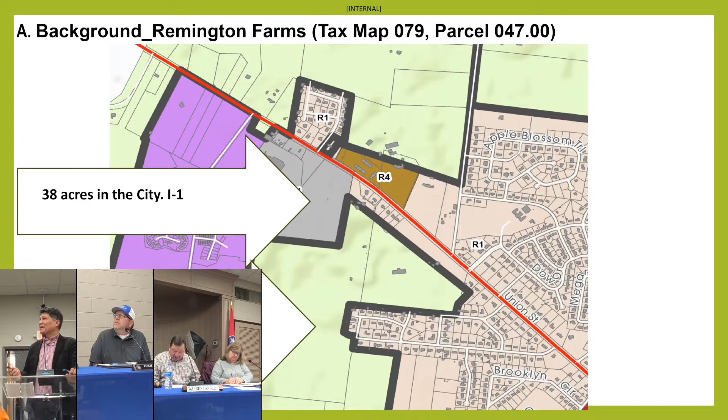Since that time, the applicant has addressed all the items, 1 through 8. Number 9 is a general comment that we add under the procedural notification, and that typically happens further down the line when, by the time the final plat occurs, that is the recording of the stormwater management agreement.

These meet our standard, but just a general comment: you've got 9 units and 13 parking spaces. If a couple people have a friend over, you'll have people fighting over parking, so maybe we should look at some of those parking standards. Yes, at the end during the staff report I have that as one of the items.

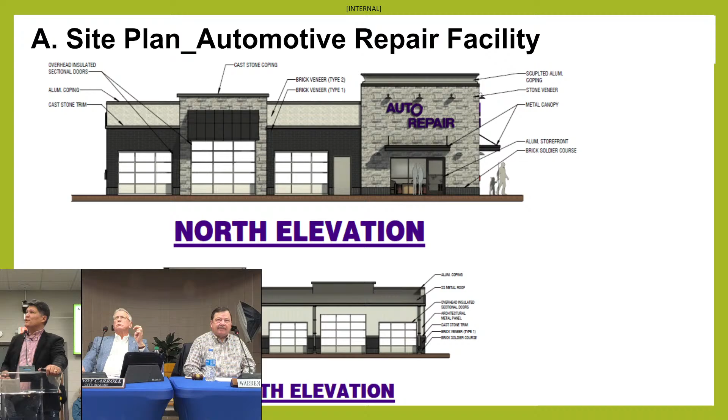Going to the elevation, you'll see the north-south elevation and then the west and east elevation. Referring back to the design standard, it's a bit hard to read, but typically the preferred materials are those visible from the right of way, which historically is where people put the nicer materials for what's visible.

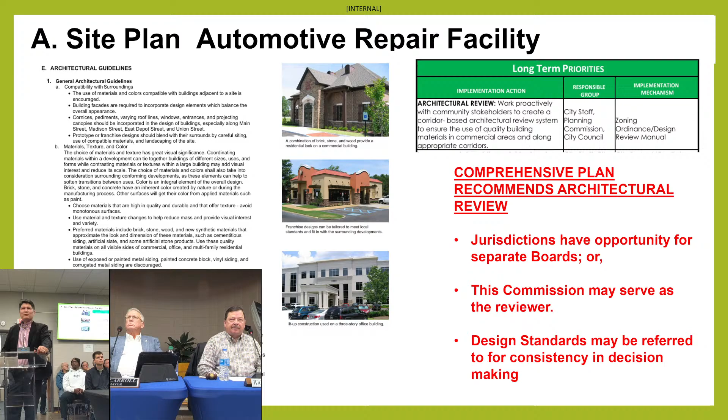On the dumpster, does the metal panel have to conform to the exterior surfaces, or can it just be metal? The dumpster also has to match pretty much the same design.

It's not on the main thoroughfare, but that's around the property we're looking at for a new hotel and all those kinds of things. Are they going to have vehicles that'll be long-term there while they're working, or will it just vary? You just don't know?

I don't know that part of it, but I'm sure the maintenance of traffic will be a consideration during the construction time period. In this map you can see where all the developments are. This is where this facility is, this here is I think a CrossFit on this site, and this is the hotel site — they're all on the agenda today.

Right. And we're talking about bringing the traffic from the hotel back out on Green Lane, correct? As well as on North Main, when that develops? Have we gotten that far yet? We haven't gotten that far yet.

Is there some type of barrier used, maybe if there was long-term storage, to buffer that out? I know it's not a major thoroughfare, but with automotive uses things can get a little messy. I know we have codes to deal with that, but is there anything we can do up front to buffer that, maybe fences or something? Is that in the design or the plan?

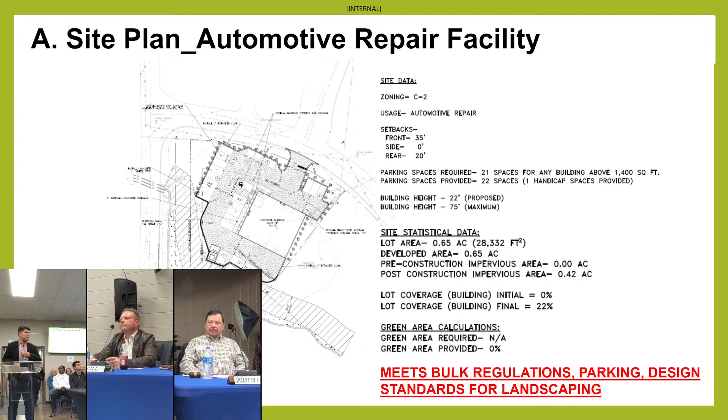What do you mean by buffering — are you talking about screening? Yeah, screening it. Typically, in our design standards, you would have screening if they were different uses. Since they're all C2 commercial zoning districts surrounding that, there's no requirement other than what's in our design standards for adding landscaping surrounding the parking lot and typically around the building as well. So it's totally surrounded by C2.

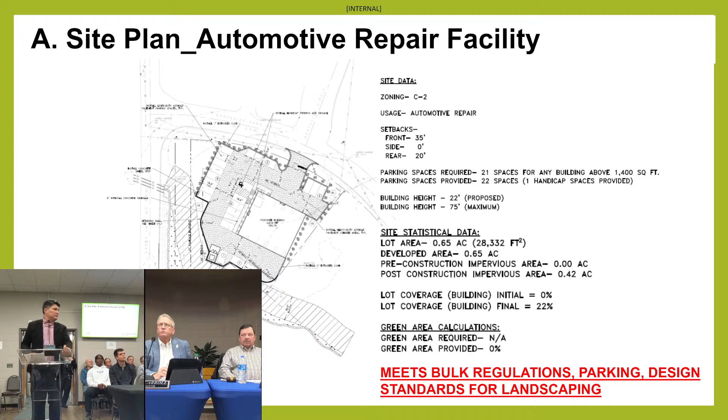I'll entertain a motion. Motion approved.

With their condition of the 3 procedural notifications. Okay, let's see, there are the procedural notifications. Okay, second, I have a second.

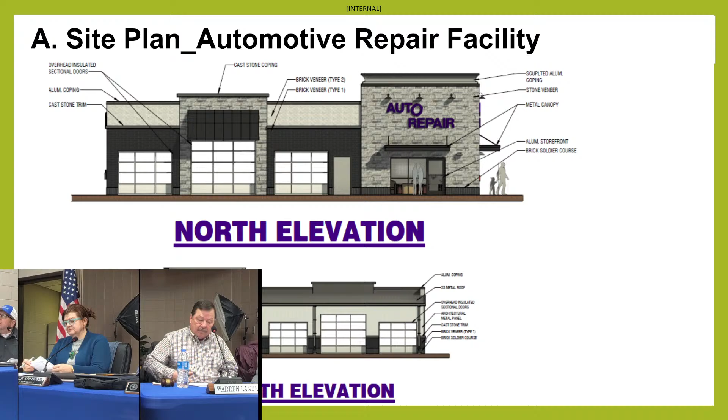Roll call. Chairman Landers, yes. Commissioner McGee, yes. Commissioner Mower, yes. Councilmember Blevins, yes. Commissioner Wilhoit, yes. Mayor Carroll, yes. Commissioner Deal, yes. Commissioner Gonzalez, abstain.

Consideration of site plan application, 4,642 square feet of emergency dispatch center located on Industrial Parkway, identified in Bedford County tax records as tax map 78N, Group F, parcel 6.01, zone I2, general industrial. Total acreage of the parcel is 1.49 acres. Bedford County Emergency Management, owner, Kline Swinney Associates representing.

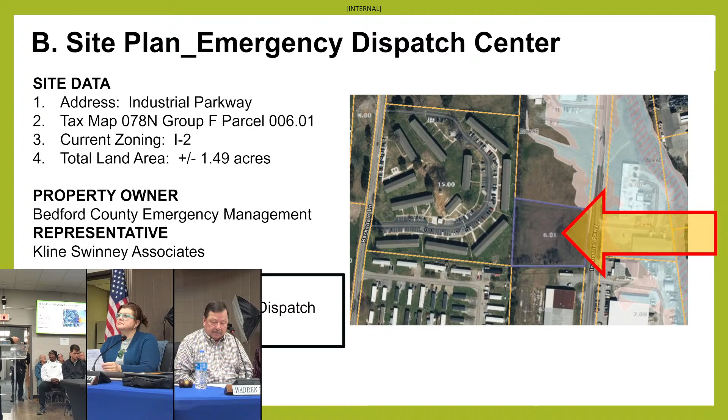So for orienting, this is Bedford Manor here. It's on the backside of Bedford Manor along Industrial Parkway. This is the same area that Public Works is located in. They met all of our requirements.

Majority of these, as well as 5 of them, are related to general comments, such as recording the stormwater management agreement, if there's any permits that are required for TDOT access. This is a secured facility according to the applicant, and they're requesting waiving of the landscape requirement, similar to the Justice Center.

In this case, they have just an open, empty lot that has high visibility. And then Shelbyville Power had one item, which was the cleanouts for according to Shelbyville sewage system requirements. And then they'll need electrical feed for the backflow device. But these are all items that can be handled during the construction phase.

For the design portion of it, this is in the industrial zone, so they're permitted to have metal siding, things like that. And I believe, based on all the other review, it meets all of our bulk regulations, our parking, and you'll see the secured facility note on the site plan.

And the applicant, they were here. They did have one change to the material, and maybe you'll be kind enough to show us where it is. What you see with the vertical lines that we had is metal paneling. It was on mineral wool insulation. We were changing to EIFS because of budget overruns. We're planning on doing a smooth metallic finish EIFS and doing vertical grooves in it from the street.

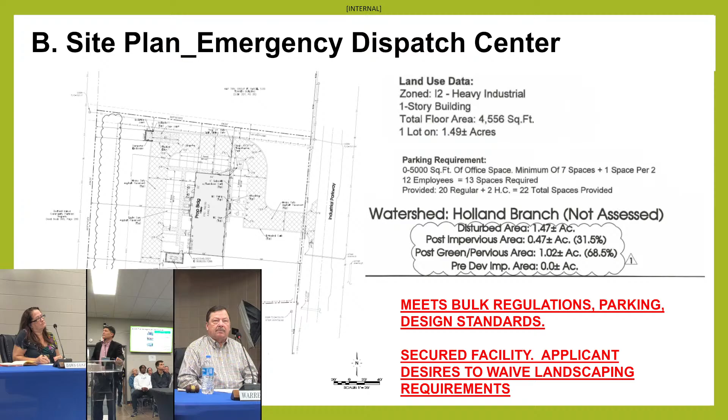99.9% of people won't be able to tell the difference between the two once we change it out. There's a lot of flexibility in the industrial district as far as the material for the siding goes. All the brick that you see in those renderings, all the brick stays. We're not removing any brick. So, okay.

I have a motion to approve. Second. I have a second.

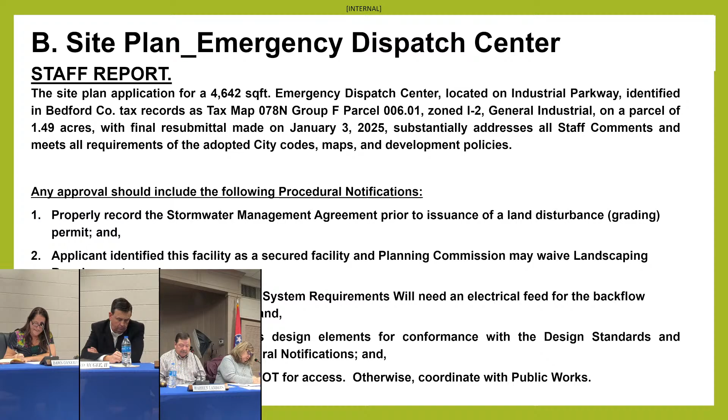Roll call. Mayor Carroll, yes. Commissioner Moore, yes. Commissioner Gill, yes. Commissioner Gonzalez, yes. Chairman Landers, yes. Commissioner McGee, yes. Councilman Blevins, yes. Commissioner Wilmot.

Consideration of a site plan application, 4,000 square foot CrossFit gym located on Lot 6 Northside Park Drive. Identified in Bedford County tax records as tax map 78, parcel 12.10, zone C2, general business. Total acreage of the parcel is 0.46 acres. Trey Stewart, owner. Scott St. John is the representative.

Yep, but I see I'm in error here because that is supposed to be Trey Stewart that owns that property and not Akil Najad. So in essence, the same thing with this one.

There were only 3 procedural notifications, having met all the other standards related to this project. 2 of them, 1 and 3, both have to do with the construction. They're just general comments on there.

And then the planning commission, if you'll review the elevation building design, and as we can see it there, it looks good. But as far as the site plan goes, it meets all the requirements for the landscaping, parking, as well as bulk regulations.

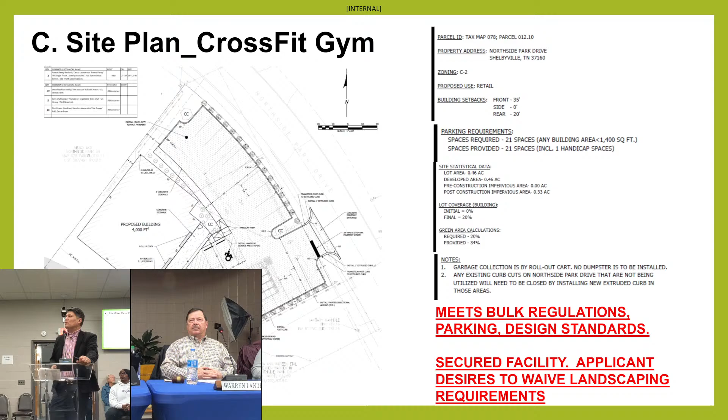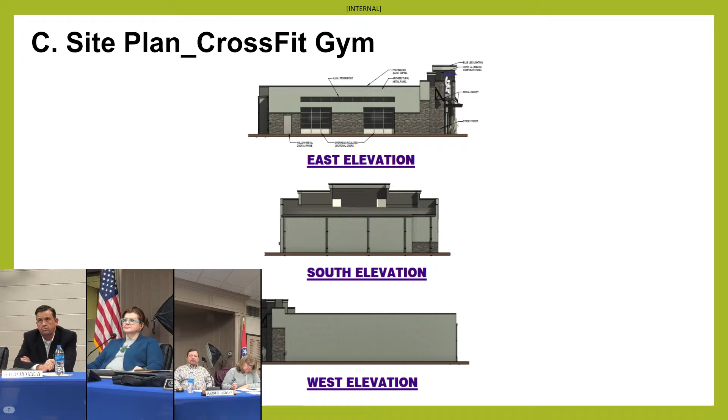What's the parking area for that? How many spaces does it have? We haven't gotten to that point on the site plan yet, have we? Yes, the minimum parking required is 21 for this size building, and that's what they have, including the handicap space.

Because we don't need that last condition now, or do we? If we are approving it, I'm trying to figure out a way to handle that. Number 2 or number 3? If we do approve it, then we're approving the design features of the elevations.

I know it takes some getting used to because I just threw it in there today. It's all good.

I'll make the motion to approve, with two or three procedural notifications, as presented. There you go, three procedural notifications. Second? Did we get a second? Okay, motion made and seconded, roll call.

Commissioner Wilhoit, yes. Councilmember Blevins, yes. Commissioner Moore, yes. Commissioner McGee, yes. Chairman Landers, yes. Commissioner Gonzalez, abstain. Commissioner Gill, yes. Mayor Carroll, yes. It's approved, thank you.

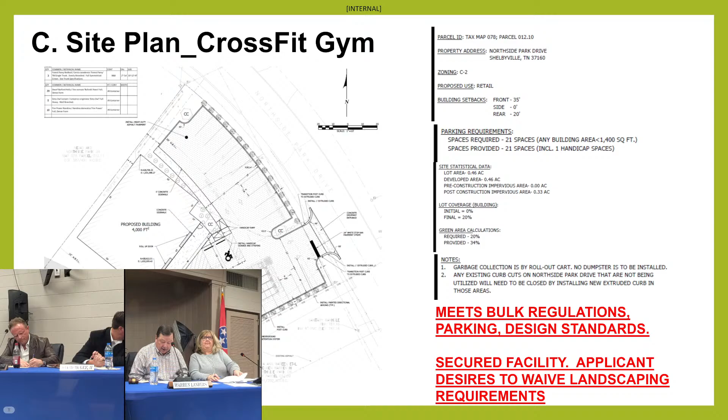All right, consideration of the site plan application for a 46,610 square foot Hampton Inn Hotel located at 106 Northside Circle, identified in Bedford County tax records as tax map 78, parcel 12.16, zoned C2 general business. Total acreage of the parcel is 1.62 acres. TENN Star owner, March Adams and Associates as representative.

Okay, so you see all the development in this corner area, but the whole area mostly is built out. So this is the Hampton Inn, and one of the things that actually just made me think about, I'll have to confirm, buildings over 20,000 square feet require a TIS.

Is it the building footprint? I think it's in the subregs. It's over 20,000 because we required that—that was one of the comments I made, actually, it just made me think about it when I was looking at and thinking about my comments. Let me look that up.

But at any rate, there were a number of comments on these. Most of them are minor, and they're general, recording the stormwater management agreement. You'll see that on all site plans as well as subdivisions that have a stormwater feature. This one didn't have a photometric plan, but that's a minor item they can easily correct. Typically we request the photometric just to see what the lighting spilling over the property line is.

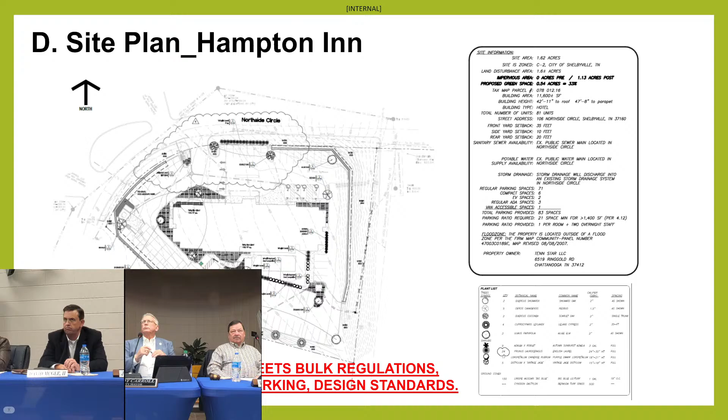But it met all the other requirements for bulk standards and parking, and as far as the design goes, this is consistent with their corporate design, I believe. You'll see from the elevations the different types of materials they're using—they've got EIFS, as well as some materials like stone or brick-type material.

So 4 stories, is that what it looks like? Correct, yeah. Yes, in this zoning district you're allowed up to 75 feet, and I believe this one was 50 feet. Okay, exit and entrances—are there more than one?

Let's see. Okay, yes, here's one. And then it looks like they're just the one. Just the one, okay. Are you with—yes. Joseph, yeah. Yes, okay.

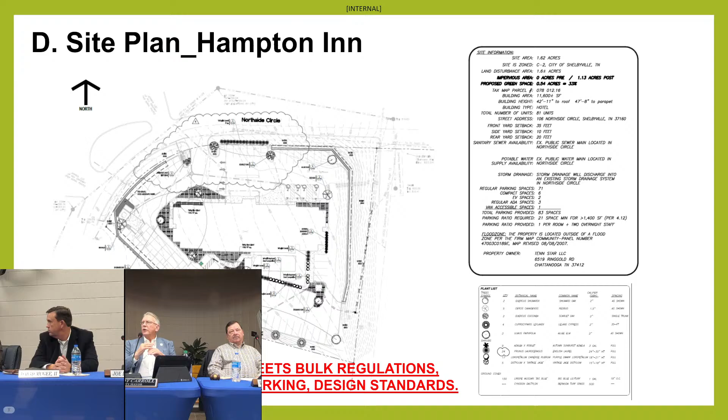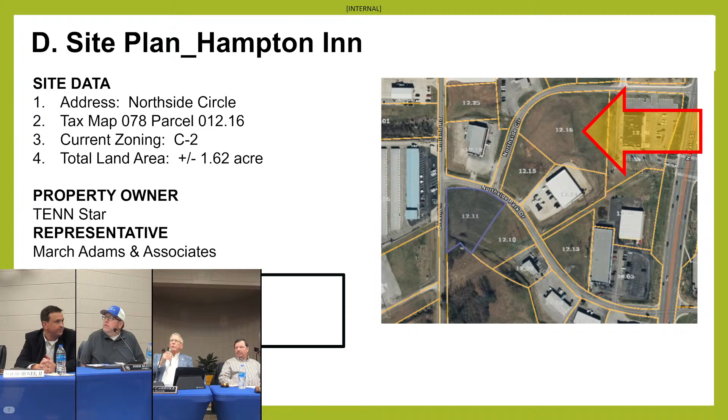This would be covered by the TIS, I guess, but at this particular location, there's no way to get to a traffic signal from here. All the cars coming and going from 231 - both of those intersections don't have red lights right here. That was going to be my concern on that.

Does it require a TIS currently? Yes, it'll require a TIS. So in your approval, if you can add one of the procedural notifications... Cade's working on it. Typically a traffic study can be handled as part of procedural notification.

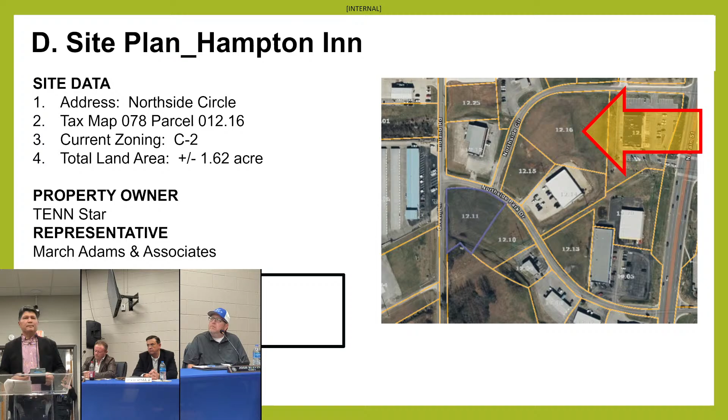That's been done on multiple site plan projects, like Cooper Steele's project - that's the most recent one. So if we can add one procedural comment, number 6, requiring a traffic study, we can coordinate with the applicant on which intersections to analyze. We'd need approval from staff, I guess, instead of the planning commission? It doesn't need to come back before the planning commission, because if there's any off-site improvements, we can handle that amongst staff as well.

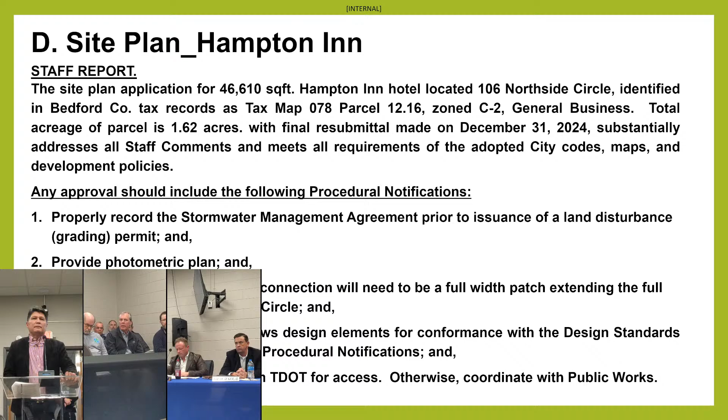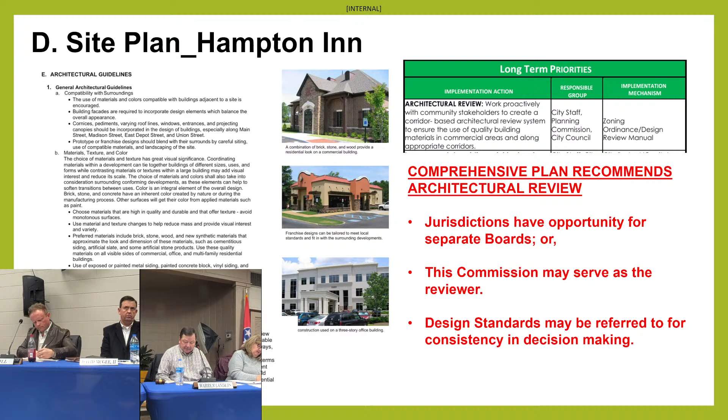Make a motion to approve with the attached 6 procedural notification, including the traffic study. Second. I do have a second. Roll call: Mayor Carroll, yes. Commissioner Gill, yes. Commissioner Gonzalez, yes. Chairman Landers, yes. Commissioner McGee, yes. Commissioner Moore, yes. Councilmember Blevins, yes. Commissioner Woodhull, yeah. Thank you.

Consideration of a minor subdivision preliminary plat, Jennings Station Phase 3, located on Jennings Lane, total of 4 residential lots, identified in Bedford County tax records as tax map 79E, Group A, parcel 1.02, zoned R1 low density residential, total acreage parcel 2.49 acres. Gary Boyce Construction owner, North Dakota Surveying representative.

This is the location - you can see it's just south of Stardust and to the right of Jennings Lane. That's where I live, this is the actual graveyard. I think there's an access back - there's one house when you turn off Union Street on the right, and then the lots - there's a pumping station or something there, and then those 4 lots go between there and the next street up, which is Stardust I think. Yes, and there's an access easement - I think it used to belong to the Church of Christ.

This one has 4 additional procedural comments as well. Number 4 has to do with access, they'll coordinate that with Public Works, but I've been putting all these general comments on there. If the planning commission approves this, they'll need turnaround space to avoid backing out. And also adding a note - as far as no construction permitted in stream buffer, we're planning to make that more consistent within the procedural comments too. It's not noted on there. And this one doesn't have stormwater management listed, but it's just a general comment.

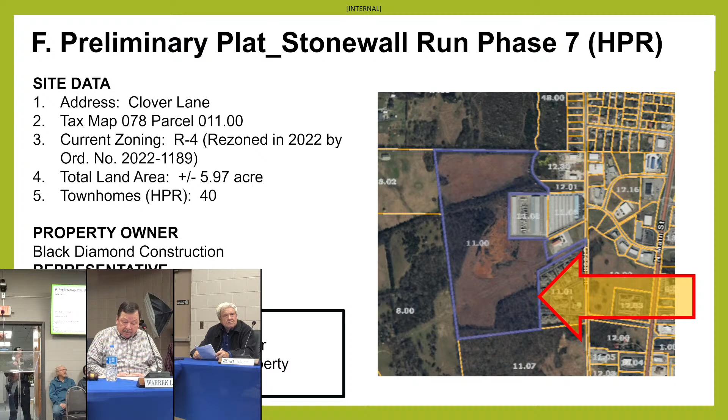The location of this application is right along here - this is Curl Properties abutting it. This is for 40 townhome units. This property was rezoned to R4 back in 2022. There were a number of items that needed to be addressed in this application - you'll see a number of comments, but it might be easier to go straight to the plat itself. This is the concept plan reviewed back in May of 2024. When you look at the actual preliminary plat, it's pretty similar - I don't think there's any changes to it.

This is the location, Phase 7. This is the preliminary plat, gross density of 86.68, so they're well below that.

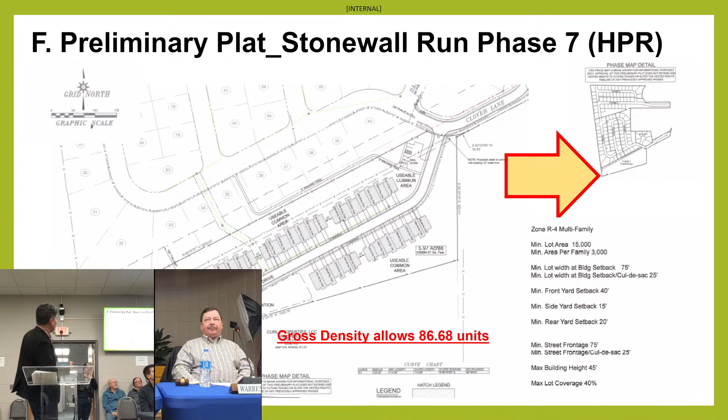Some of the comments that came back during the staff review had not been addressed, although I spoke with David Boyce this afternoon on some of the items, and he nominated Scott St. John to speak about it if we need to.

But some of the items missing on this location had to do with the length of the driveway, and in the plat itself, it identifies the driveway width as 10 feet. One of the concerns was the available parking. The applicant had suggested you've got 2 parking spaces, one in the garage, one outside. Will Owen had recommended possibly widening the driveway to allow for 2.

David suggested that's what he was going to do, but it's not identified in this plat. Some of the other items, there's no setback on it, so we couldn't tell how many parking spaces were going to be on there. As you can see, here's a drive that's 10 feet wide with 1 in the garage, but it's insufficient for 2. I can't tell without actually scaling it.

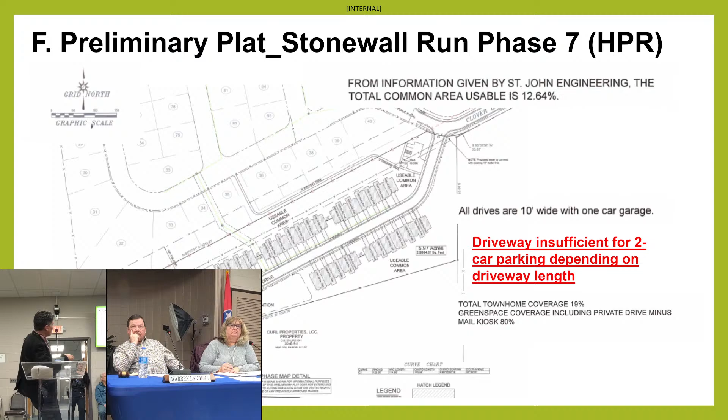As far as meeting all the green space requirements, it even identifies that green space doesn't include the mail kiosk, which is a pet peeve of everybody's, including myself.

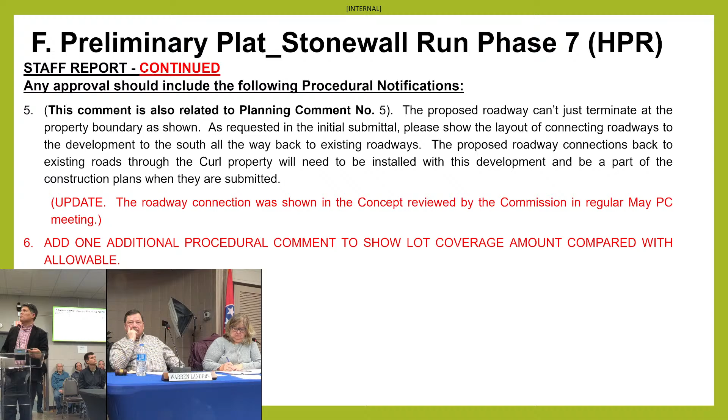As far as the procedural comment, I believe the mailbox kiosk is now a requirement from the federal postal service. That's correct. So they would need to include that, correct? That's correct. Mail kiosks are a requirement for multifamily, and typically what ends up happening is that it gets calculated as part of the green space.

As far as the procedural comments go, there's a couple that are just typical for during the construction phase, which is recording the stormwater management agreement. Utility layout needs to be discussed, but that can be done during construction as well. One of the missing items is a dimension for the individual building.

Last month we had Celebration Downs, which was a similar case. But I wanted to also bring up that about a year and a half ago, 2023, there was an application, Madison Town, very similar to this one with some of the information missing. That one was approved, and Celebration Downs was deferred. I only bring that up to offer a little more consistency in the decision making, but also to bring a little more history, because I hadn't done that in the past.

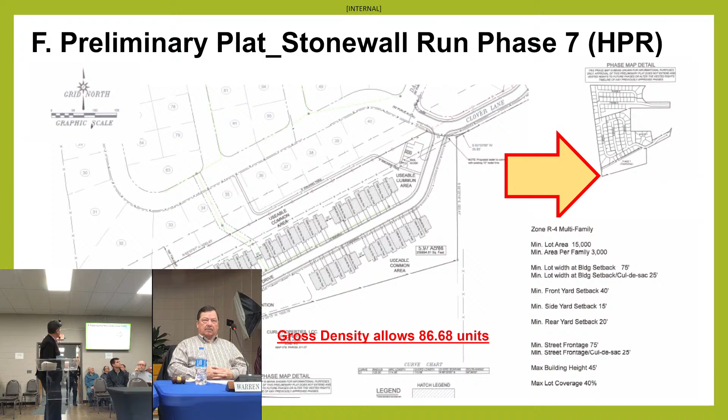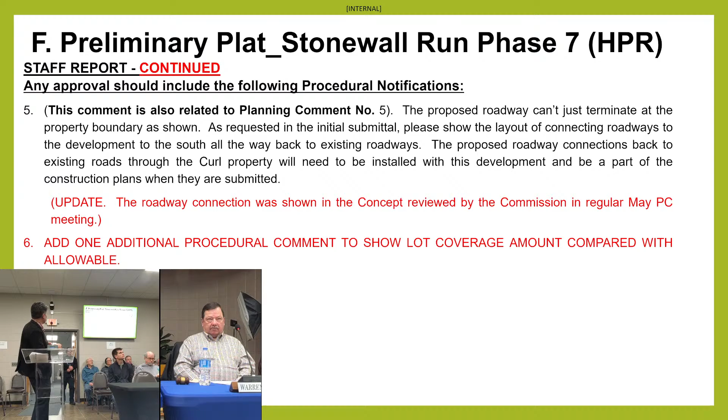Going back to the procedural comments, number 5 is the one related to the drive connection. So we have 3 comments that were not addressed, and one additional one, which is to provide the lot coverage. Based on this information, the planning commission could either approve this with those procedural comments, or if they prefer to defer it, that's also an option.

Are these comments sufficient to be addressed in 30 days? Sure. So yeah, I would say we make a motion to defer.

I also have a question regarding the two drawings you showed. Was the connection shown on one but not the other? Yes, that right there, this connection, that connection is on somebody else's property. So how does that pertain to us approving or disapproving that connection if there's no... are we going to approve it without that connection? Because we can't make them make that connection unless they have a lease option with the neighbor.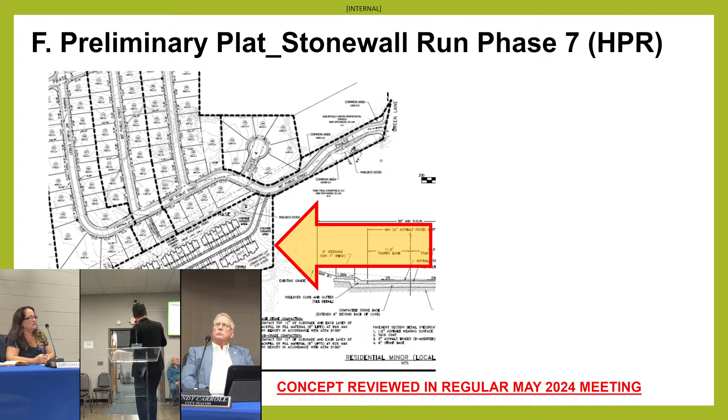No, that's not the intent. The intent is just to clarify what that connection is, because you see it here and it's not shown on here. Yeah, but you see it on one, so who's going to be responsible for making it? Are we going to make it a priority to make sure that connection is there, or are we not going to require them to have that? I'm confused.

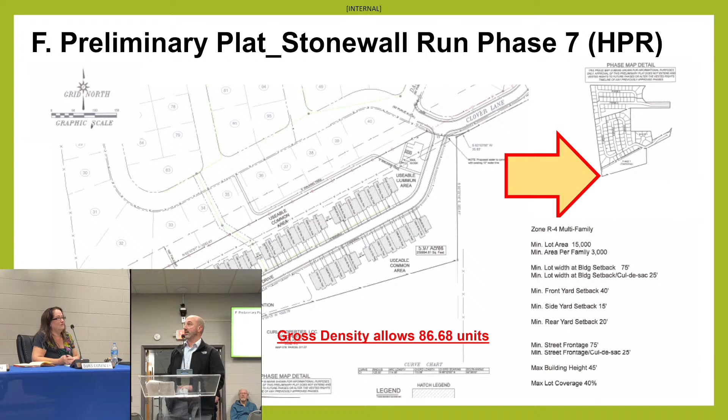The staff comment was that connection absolutely needs to be a part of this approval. The applicant has proposed that connection, and we will implement it. Otherwise, this would not be built in the manner I'd recommend. So we need to make a motion to not approve it until we know they've acquired that piece of land, or have an agreement with the neighboring property. No, you can approve the preliminary plat contingent on requiring that connection. Then when construction plans come in, if there are no plans for that connection, we won't approve them and they can't proceed.

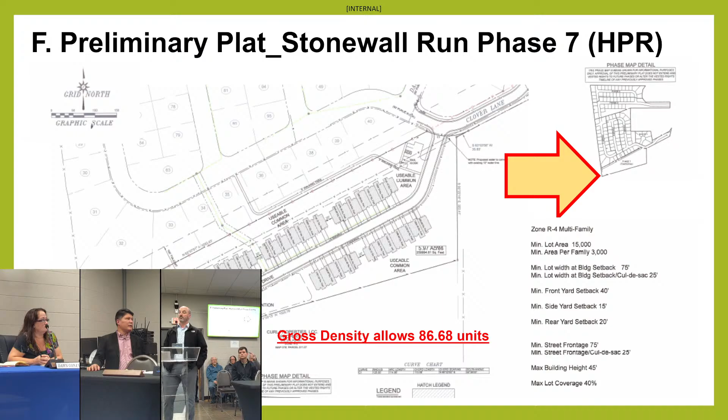So I don't think you necessarily need a condition requiring proof the adjacent property owner agrees. Although staff has had discussions with that adjacent property owner, and they've confirmed agreement with the layout of that connection—it's the same design engineer. So it has been coordinated between the property owners. I don't anticipate any issue, but that connection absolutely needs to be made. Otherwise you've got a really long dead-end cul-de-sac without a turnaround, particularly for emergency services vehicles. So that's why I would not recommend approving it without that connection or an alternative measure that hasn't been proposed. I agree.

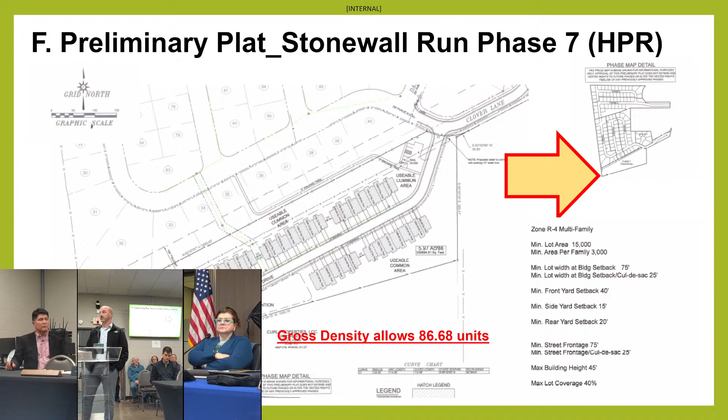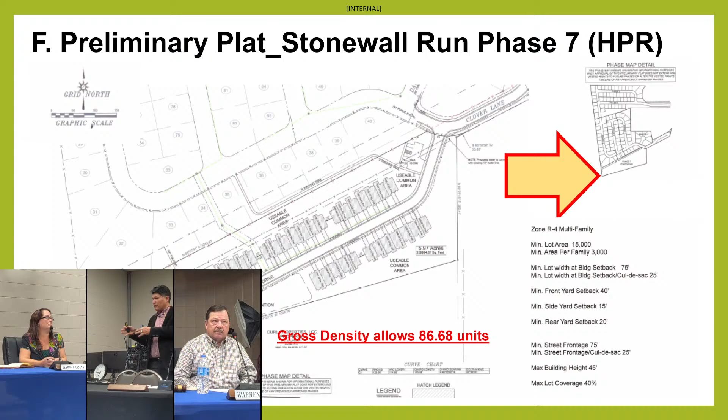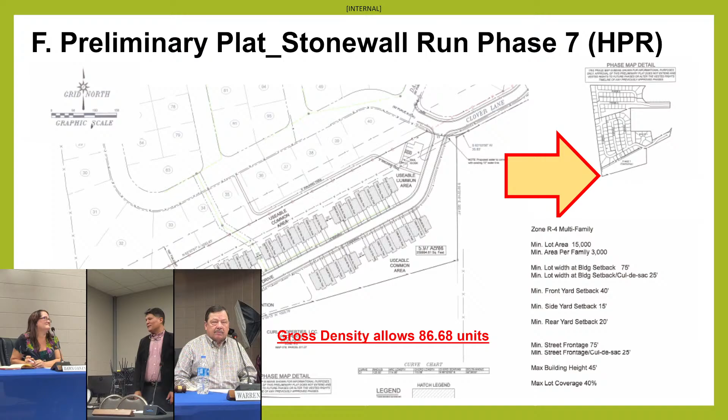My main concern was that he's only shown the connection to the property line because legally that's his boundary. So how do we ensure the development continues in that direction beyond the boundary? Just so you're aware, the preliminary plat, construction, as-built, and final plat all have to be consistent. So at any phase, definitely at construction, there's the ability to address that condition. And both parties are in agreement—Greg Curl is the owner of that property, and he agrees as well. So what you'd see when the final plat comes back is a dedication of right-of-way through the Curl property incorporated into that final plat.

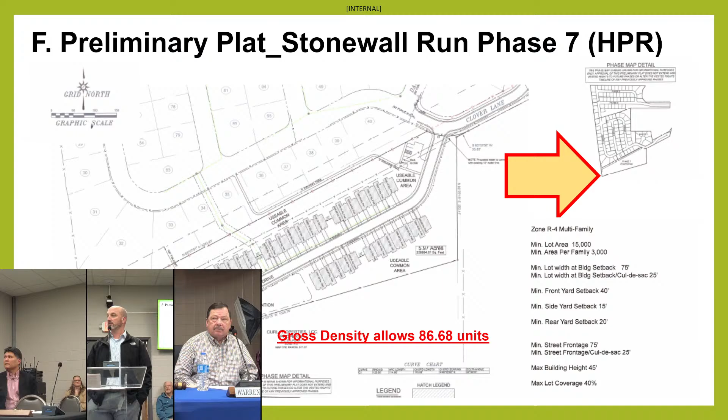Okay, I have a motion to defer with those comments, and since I have a second, we will do a roll call vote on the deferral.

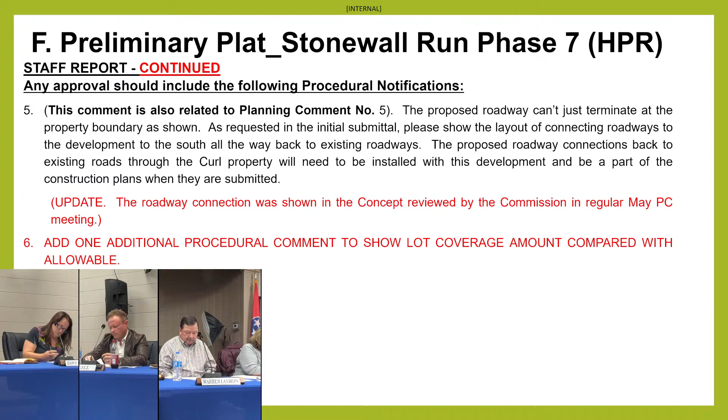Commissioner McGee, yes. Councilmember Blevins, yes. Commissioner Wilhoit, yeah. Commissioner Moore, yeah. Mayor Carroll, yes. Commissioner Gill, yes. Commissioner Gonzalez, yes. Chairman Landers, yes. That will be deferred for 30 days.

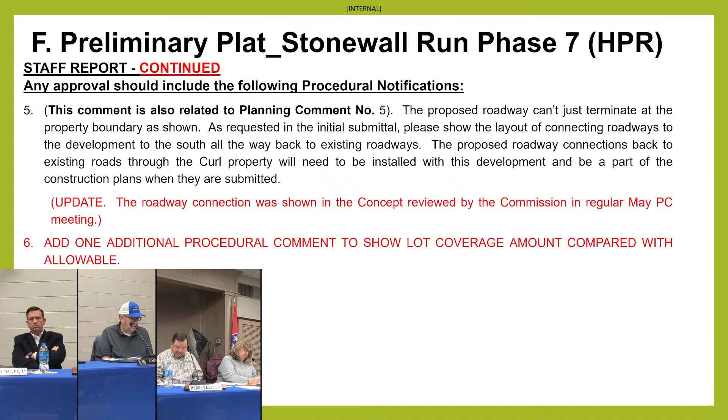All right, consideration of a major subdivision preliminary plat, Global Manor Phase 6, total of 39 residential lots on Triple Crown Court, Winners Circle, South Winners Circle, and Meadowlands Park Drive, identified in Bedford County tax records as tax map 69, parcel 25.02, zoned PUD. Total acreage is 7.28 acres. Global Homes owner John Stefanski is represented.

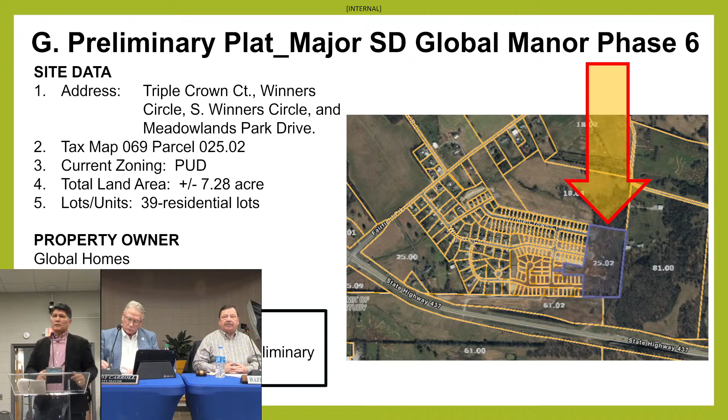So the next three applications are all Global Manor. If you recall, in the October meeting we saw this PUD amendment, so all the preliminary plat applications you're seeing today relate to that. This one is Phase 6, located on parcel 25.02, with 39 single-family lots in a PUD. All of these met the requirement for a preliminary plat. General comments again on recording the stormwater management, and coordinating any type of access. This one, because there's a public right-of-way, has a dual nexus—the essential nexus and rough proportionality—so the dedication of the 50-foot right-of-way impacted by the development is proper for this project.

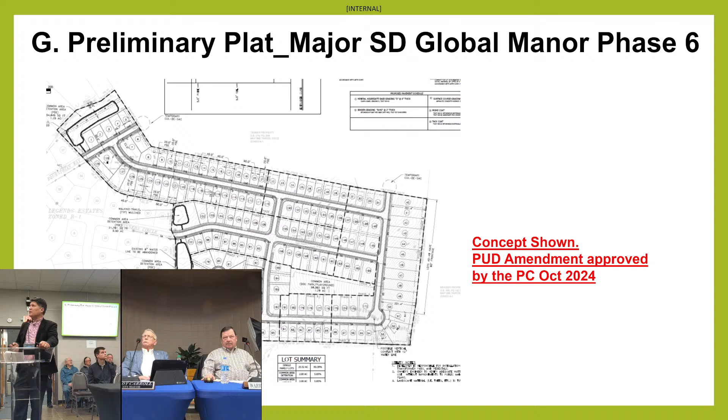So here's the concept drawing, and this is the plat, which you'll see is Phase 6. This is all consistent with that amended pattern book from October, and it conforms with all of our subdivision as well as our zoning regulations. I believe all the other phases are either under construction or have been constructed, correct? Yes, I think he's ready to do these parts.

So we're looking for approval for this based on the 2 procedural notifications. I make a motion to approve with the 2 procedural notifications being said. I'll second. I have a second.

Roll call. Mayor Carroll, yes. Commissioner Gill, yes. Commissioner Gonzalez, yes. Chairman Landers, yes. Commissioner McGee, yes. Commissioner Moore, yes. Councilmember Blevins, yes. Commissioner Wilhoit.

All right, consideration of a major subdivision preliminary plat, Global Manor Phase 10. Total of 11 residential lots on Equestrian Way, identified in Bedford County tax records as tax map 69, parcel 18.04, zoned PUD. Total acreage is 1.68 acres. Global Homes owner John Stefanski representing.

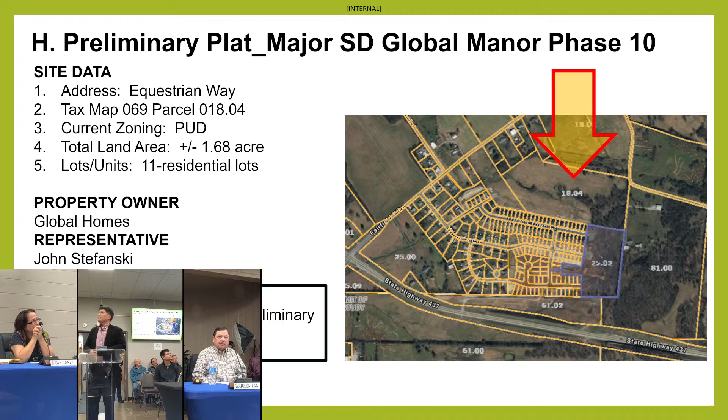Okay, so the previous application you saw was right here. Now we're looking at the remaining applications that have to do with 18.04. This one is similar condition, okay, I changed my mind. This one is a special case and it might be helpful if I go to this map.

In order to provide water, the water has to come across number 7. So 7, 9, and 10 are connected on this. Mr. Stefanski is wanting to phase 7, 9, and 10. And so I'll get to the options on that.

As far as the procedural notification, this has the dual nexus. This one also has to show the water and sewer manholes and fire hydrants and mains, as well as the TDOT access.

I think I didn't put the right one. You went to 11. I'm sorry, I went to number 11 there. It's very similar, but the most important part, and this is where the planning commission has 2 options.

One of the options proposed by John Freeman was that 7, 9, and 10 be consolidated into a phase. However, there's another option which also satisfies requiring that connection, which is that during the construction of this phase, all 3 — 7, 9, and 10 — are consolidated. So at the construction phase, they cannot be approved independently of each of those phases.

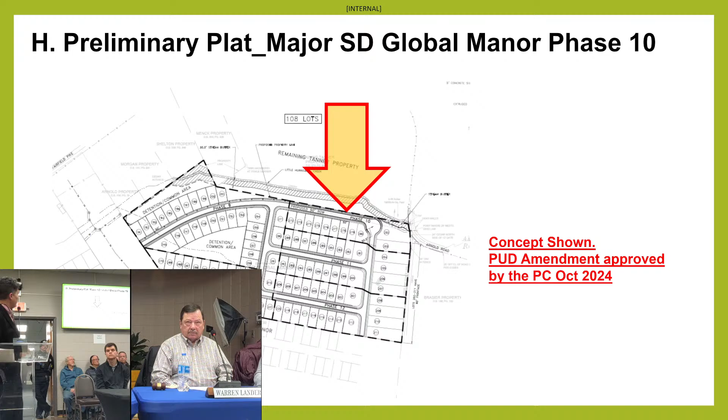And the reason being, in order to get water across, all the way to 10. So if that makes sense, I see some.

Where are 7, 8, and 9? Why do we not have that? Are they not ready? They've already had preliminary plats approved. So they've been approved. Yeah, so it's only these outskirts that are needing the approval.

Yeah, 7 and 8 are here. They've been approved, but we're looking at this side here.

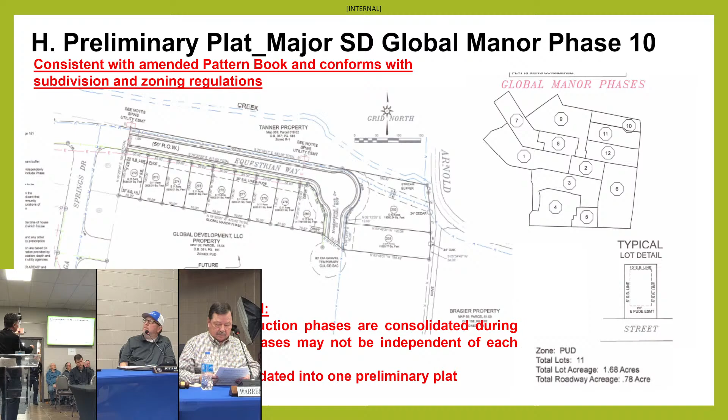So even at this phase, if you approve 7, 9, and 10 as individual phases, they would still have to do the construction for 7, 9, and 10 for any of the infrastructure in order to provide that water service there. One of the things typically done out west is you'll see the infrastructure done first before you do the rest.

So you give us an option, is that what you got? Yeah, there's 2 options. At the construction phase, we can control this part of it because all 3 — 7, 9, and 10 — can be handled at the construction phase, and that would be Will's department there, Will, Buck, and Brian Dickey.

But one of the options proposed by John Freeman was to consolidate all of those into one. But I'm sure the reason why all 3 of those are in phases is just a matter of build, as far as which one's going to get built out.

What is your recommendation on these methods? Personally, if there's a way to enforce it at some point, you can do it at number 1, because if the construction phase is not approved, it can't be built.

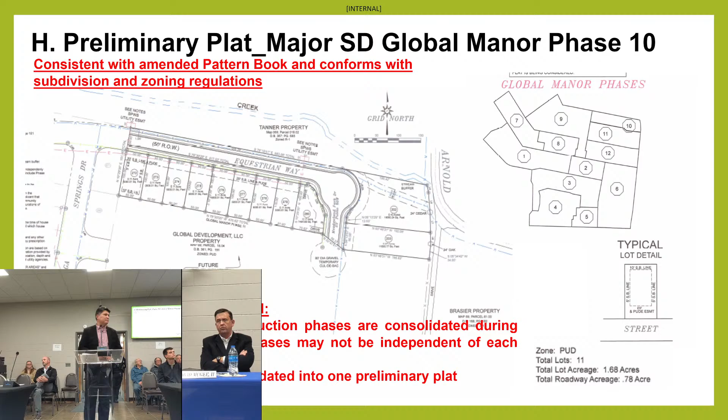And 7 and 9 are already approved, right? That's correct. So if we went with option 2, they've got to replat someday, and that's a more cumbersome option. That's why I put that one first.

10, 11, and 12 have already been approved as well. It's just that, because of construction problems, he's made the lots larger so he doesn't have to build the road as far.

And so we're having to go back through for 6, 10, 11, and 12 because they're changed from the original preliminary plat that was approved a while back. Yeah, if you recall from the discussion on the concept, these lots were all enlarged because of that hill back there. Now we know why.

I'll make that motion to approve with the easier option in the construction phase, Option one. So 7, 9, and 10 - their construction has to be integrated, but they don't need to combine plats.

Second. Motion made, second, roll call. Commissioner Gonzalez, yes. Chairman Landers, yes. Commissioner McGee, yes. Commissioner Moore, yes. Councilmember Blevins, yes. Commissioner Wilhoit, yes. Mayor Carroll, yes. Commissioner Gill, yes. Approved.

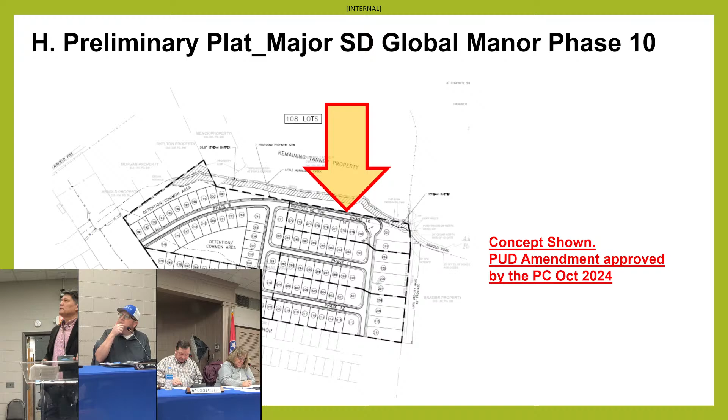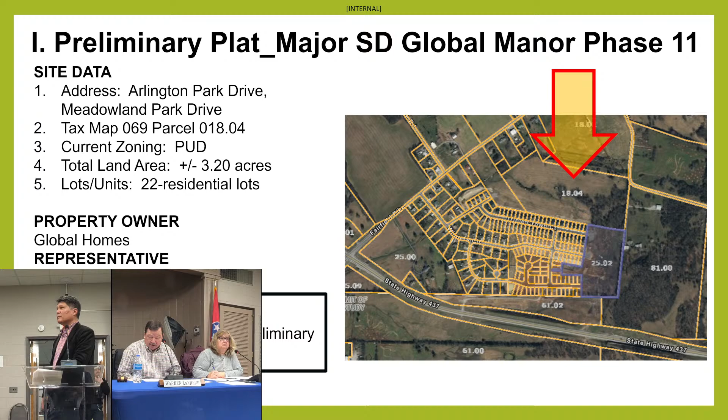Consideration of major subdivision preliminary plat, Global Manor Phase 11, totaling 22 residential lots on Arlington Park Drive and Meadowland Park Drive. Identified in the Bedford County tax records as tax map 69, parcel 18.04, zoned PUD. Total acreage is 3.2 acres. Global Homes owner John Stefanski representing.

So same location, 18.04 is the parcel. Similar with the remaining two, there's only 3 procedural notifications. We do have the dual nexus for the dedication of 50-foot right of way. And similar to the previous one, just to show the water and sewer layout for the fire mains, which can also be handled at the construction phase. So all of these are related to the construction comments.

This is the location that we're looking at, and here's the phasing map. Let's see, phase 11 between here - oh sorry, that was the concept plan. This is the actual plat, so that is in there. It meets all of our regulations and conforms to the pattern book. So requesting approval based on those procedural notifications.

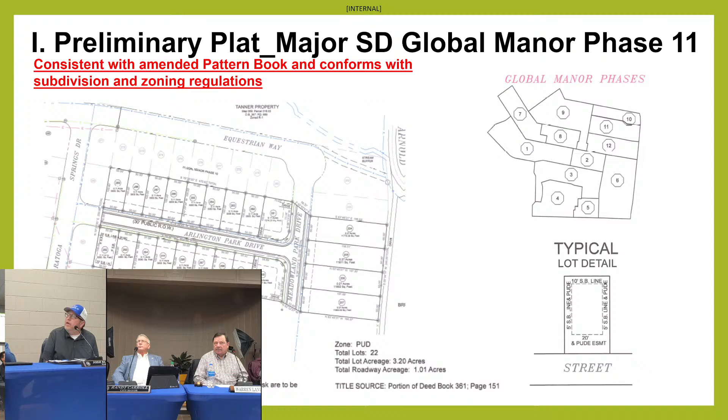Can I ask a question on phasing? It might be a procedural notification - is there any chance he might build 11 and 12 before he gets to 7? I wouldn't want 11 and 12, which are connected to 6, to be built before 7, because we don't get that second access to Fairfield Pike if he starts working counterclockwise up that right side. You mean build 11 and 12 first? Right, yeah, they have a connection to 6. We wouldn't want him to put those houses in there without 7 having been built first to get our second connection point to the neighborhood.

Six is, oh okay, six is actually approved, six is gonna be built down there next. Okay, but after 6 was built, we don't want him to jump to 12 and then work his way up, because then we're getting a bunch of houses without getting our second required connection. I think from a functional standpoint, it may not be feasible or efficient to do it that way.

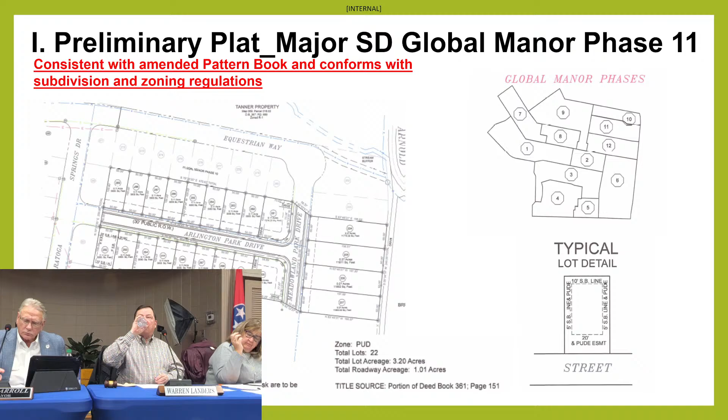So are you suggesting that we just do a procedural notification that 7 has to be built before 11 and 12 can be put in? Kind of like we did with 7, 9, and 10. I mean, yeah, I don't know, I've never had that question before.

Yeah, and that neighborhood's getting dense, and right now we've got one access point to our right of way. And if we keep building up counterclockwise without putting those back access points in, you're not gonna have that same access, you're gonna get a safety issue at some point. Okay, I understand now. And that may not be the plan, just want to make sure we cover ourselves.

So is it for this procedural notification, or which phase do you want? 11 and 12 would be the issue, because they could be connected to 6. So just add a procedural notification that 11 and 12 can't be constructed until we have our access point set. Okay, I see what you're saying now.

Okay, with that point being made, do I have a motion? I'll make that motion if you can figure out what I was talking about. Yes, you just want to make sure that the second access is created before we start working on that part of it. Right, yeah, because typically it would be sequential. Right, but now we're going 7, 9, 10, so we're jumping all over the place.

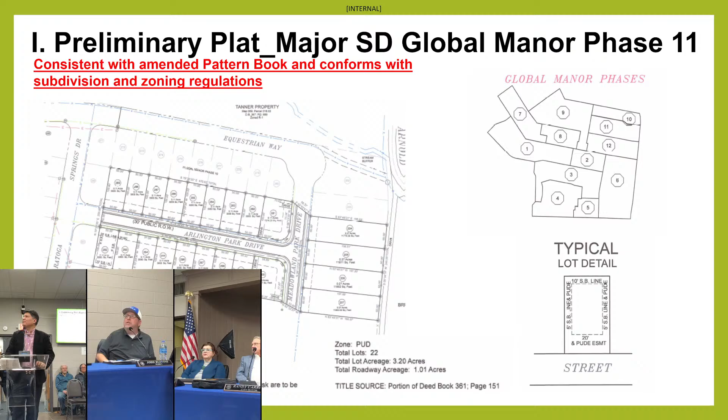Did this have other procedural notifications? Will be adding, yes, number 4. Okay. That, he made the motion - I've got a motion from Josh. Second. Got a second. Roll call.

Commissioner Wilhoit? Yes. Councilmember Blevins? Yes. Commissioner Moore? Yes. Commissioner McGee? Yes. Chairman Landers? Yes. Commissioner Gonzalez? Yes. Commissioner Gill? Yes. Mayor Carroll? Yes. All right.

Consideration of a major subdivision preliminary plat, Global Manor, Phase 12. Total of 22 residential lots on Lincoln Boulevard and Meadowland Park Drive, identified in Bedford County tax records at tax map 69, parcel 18.04, zoned PUD. Total acreage is 3.44 acres. Global Homes owner, John Stefanski, represent.

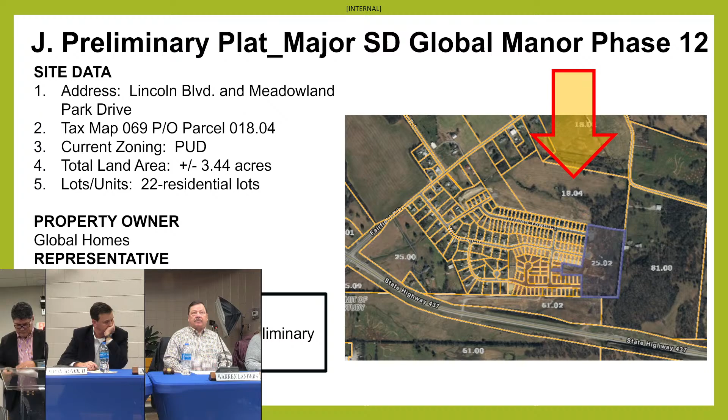And I will say that Lincoln Boulevard will probably be changed. It was just. Don't say that yet. Wait till we get through it first. It's given name. Sounded pretty good, didn't it? That was the first thing that came to mind. Thanks, Lee.

So you can see where phase 12 is, that location there. This is the concept plan that was approved at the PUD amendment back in October 2024. And this is the location that we're looking at, this little sliver here, which is along Lincoln.

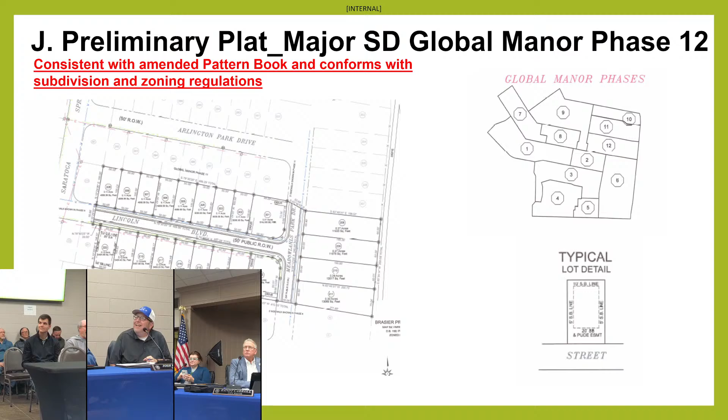Okay, that's right, because didn't you name it? That's right. But essentially it had similar procedural notifications that are all maybe handled at the construction phase. This also has, because it's public right of way, has that dual nexus — essential nexus and rough proportionality.

Okay. I'd like to add the same procedural notification to this. I'll go ahead and make the motion with those 4. All right, that the access would be built before — would build in phase 7, yeah. I'll second. Motion made and seconded.

Roll call. Mayor Carroll? Yes. Commissioner Gill? Yes. Commissioner Gonzalez? Yes. Chairman Landers? Yes. Commissioner McGee? Yes. Commissioner Moore? Yes. Commissioner Blevins? Yes. Commissioner Wilhoit? Yeah. Great. All right. Consideration of a major subdivision final plat, Lucas Grove Phase 2.

Located on Mead Drive, total of 12 residential lots, identified in Bedford County tax records as tax map 78K, group A, parcel 10, zoned R2. It's medium low density residential. Total acreage is 3.48 acres. Tory May Homes LLC owner, Northcutt Surveying is represented.

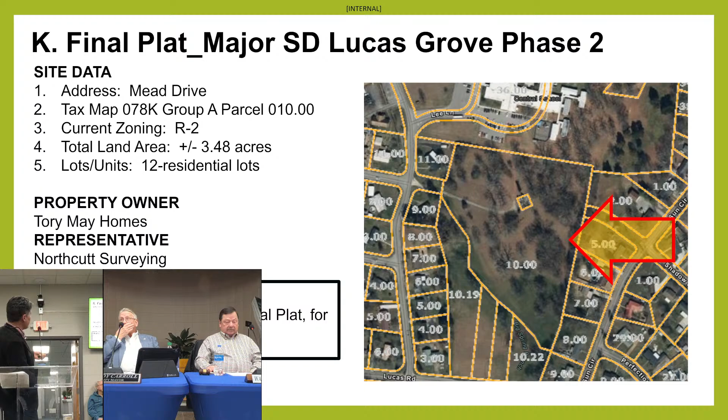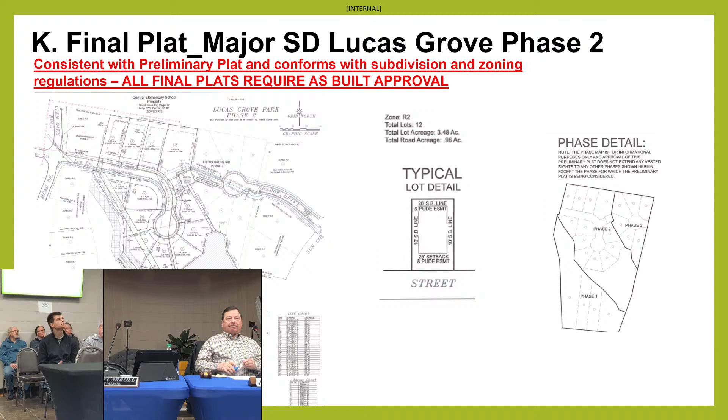Okay, as you can see, it's this larger parcel here that has a cell tower in there. We've got 12 residential units in R2. This is consistent with the preliminary plat. Sorry, this is the final plat.

I added this at the last hour as far as comments go. On all final plats, we're required to approve the as-builts. In this one, there was only one comment, from Shelbyville Power. There are 2 water lines running along Shadow Drive, and it just needs to be confirmed whether that has to be deleted or not. This one has the 50-foot right-of-way too, and the dedication.

And as you can see, phase 2 is this central section right here. And this is the actual plat. So we're asking for approval based on these 4 procedural notifications, 2 of which are related to construction. Okay, any other questions?

Motion. Motion approved. Got a motion and a second.

Roll call. Commissioner Moore, yeah. Councilmember Blevins, yes. Commissioner Wilhoit, yes. Mayor Carroll — oh, still missed out, I'm sorry. Commissioner Gill, yes. Commissioner Gonzalez, yes. Chairman Landers, yes. Commissioner McGee, yes. That is approved. All right.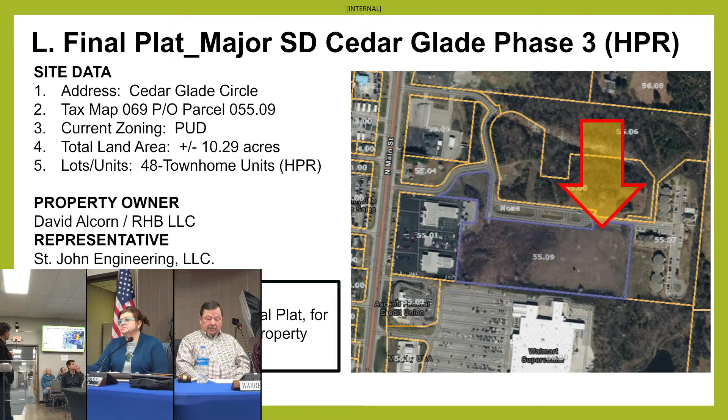So this is just north of Walmart in this larger parcel here. This initially was approved as one entire parcel, and I can show you — this is the preliminary plat from 2022. This is actually an amended plat from the original PUD.

And David came to us a couple of months ago, and the issue had to do with just getting materials. So he's requesting phasing of it, which is what you'll see here. It's just phasing this section here, so that these may be sold off, and then the others will be constructed. But it had to do with receiving taps — the taps were backlogged, and he wasn't able to get them. So he's trying to just facilitate keeping that forward momentum.

But all final plats require the as-built, consistent with all our policies and regulations. With the procedural notifications, there were a couple from Shelbyville Power that need to be done, which can be handled at a staff level: labeling the correct water lines and adding a note on the plat about construction of the cleanouts and tees. The other two are just construction phase or procedural items to make sure that's done, with as-built required for final approval.

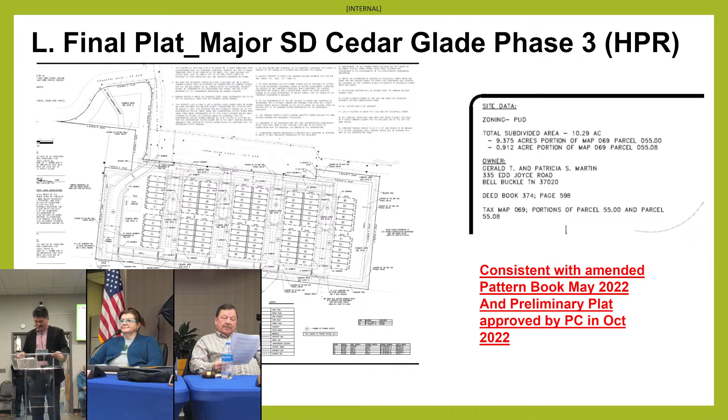So wouldn't that be a fight? Say his wife pulls up and they take two parking places, and the guy works later, comes home - theoretically he would have had parking. I think that is... this is why we need parking regulations in our city.

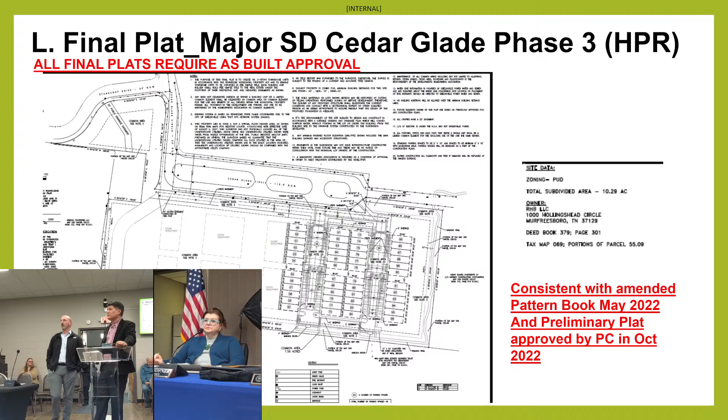This is only approving the phase. But looking at this plat, this phase doesn't include that overflow part. I don't think that 48 number is right. You think there's two spots in front of each unit? So is that just a typo on the plat? At no point in time has the town ever had less than two parking spaces required for a single residential unit. Yeah, that just seemed really low.

So that may be a typo. Well, should that be deferred then until they address that or answer that question? No, I think it can be corrected if it is in compliance with the master development plan of the PUD, so whatever it is, it is. That's what was previously approved, but I'm 99 percent certain it's two spots per unit.

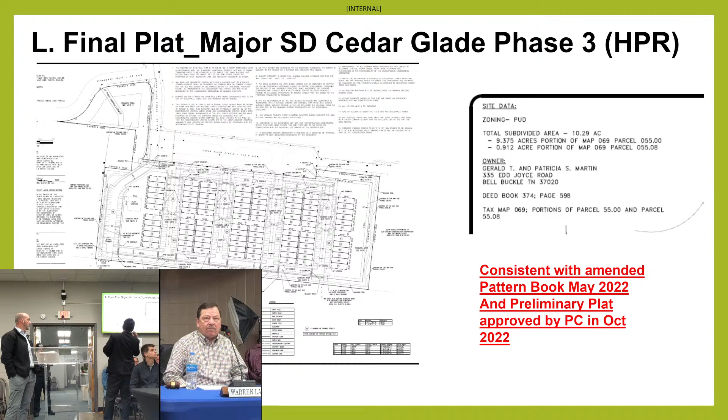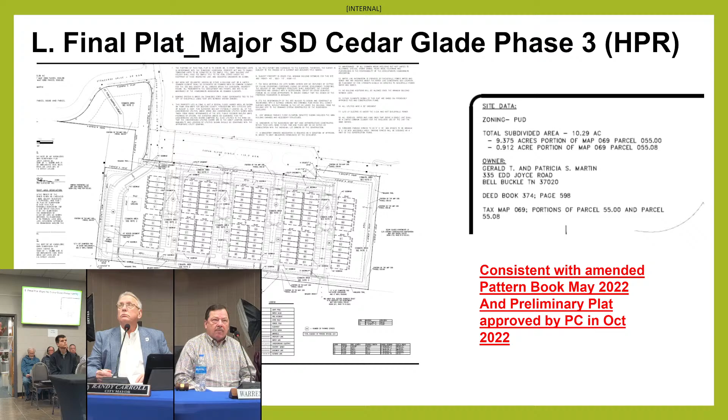There are two spaces, because the unit itself - if you look at the number of parking spaces there, it looks like actually there's a lot more than that. So it looks like they got the wrong number, I think it's just a typo. We'll get that corrected on the plat. Scott St. John was saying that the width of it is actually 20 feet, which allows you two spaces. So it looks like that's just a typo.

Is this on the... yeah, it's kind of down, you may not be able to read it on your slide, but it's down at the bottom right, which is where it actually is on the plan.

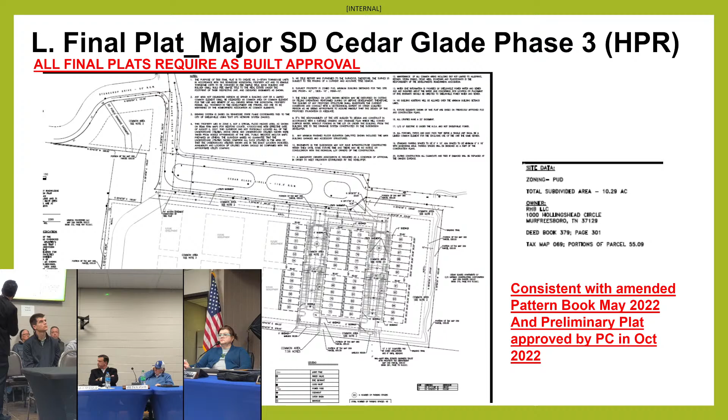Do we need to add those procedural notifications, or will you just clean it up instead? I would have - yeah, definitely added it because this is a final plat, before recording of it.

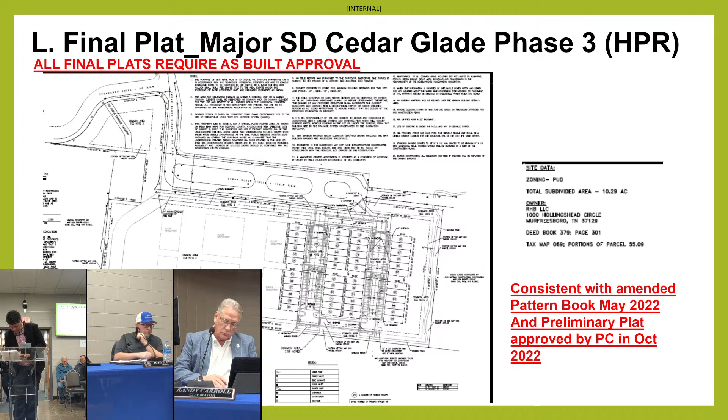Let's see. So would that be six procedural notifications? Yes.

Make a motion that we approve six procedural notifications, including the one brought up about the parking number being cleared up. I have a motion, I have a second, roll call. Mayor Carroll, yeah. Commissioner Gill, yes. Commissioner Gonzalez, yes. Chairman Landers, yes. Commissioner McGee, yes. Commissioner Moore, yeah. Councilmember Blevins, yes. Commissioner Wellborn.

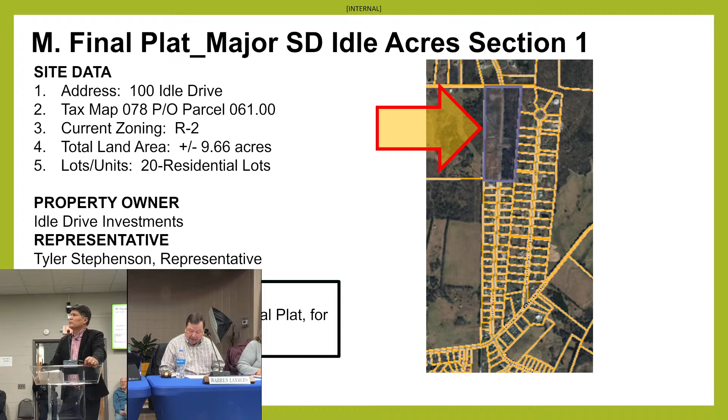Thank you. All right, consideration of a major subdivision final plat, Idle Acres Section 1, located on 100 Idle Drive, totaling 20 residential lots, identified in Bedford County tax records as tax map 78, parcel 61, R2, which is medium low density zoning. Total acreage 9.66 acres. Idle Drive Investments owner Tyler Stephenson is representative.

So you see, this is Horse Mountain Road, it's on Idle Acres, it's just this front portion that we're looking at. So this is obviously an older subdivision because you can see the way that the stormwater is actually handled on people's properties in the rear here. It meets all the requirements.

It was approved many years ago, I don't know exactly how many. It's been a while. This is under the old subdivision regulation, I'll just put it that way.

So as you can see, there's 20 lots. It meets all the requirements. Still needs to have its as-built documents approved. We have that document, it just hasn't been approved yet. And Shelbyville Power requested there's 2 water valves that they need to raise on that. The remaining items, number 1 and 4, are just general procedures for construction.

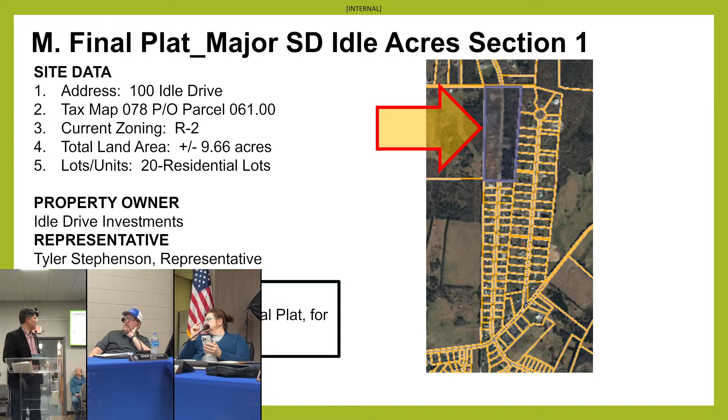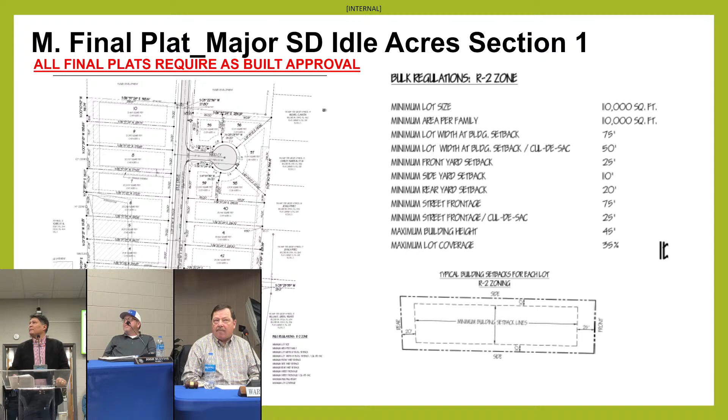Oh. Can't require any of the new stuff that really needs to go there.

One good thing, our sub-regs have changed slightly. Make the motion to approve the final plat with the 4 procedural notifications. There's 5 procedural notifications. I'll second that. Yep, there's 5.

Motion made, seconded, roll call. Commissioner Moore, yes. Commissioner Wilhoit, yes. Councilmember Blevins, yes. Commissioner McGee, yes. Chairman Landers, yes. Commissioner Gonzalez, yes. Commissioner Gill, yes. Mayor Carroll, yes. All right, that concludes that part of our program here.

Administrative approvals. We had one administrative approval. It was on 542 Shelbyville Mills Road, for a prefab fiber shelter and diesel generator. The property is zoned I2, which is being used by, I think it was Lumen Fiber. I don't particularly know all the ins and outs of it, but it's some type of fiber facility with a generator. It meets all of our requirements for administrative approval, and it's consistent with our zoning ordinance and design standards.

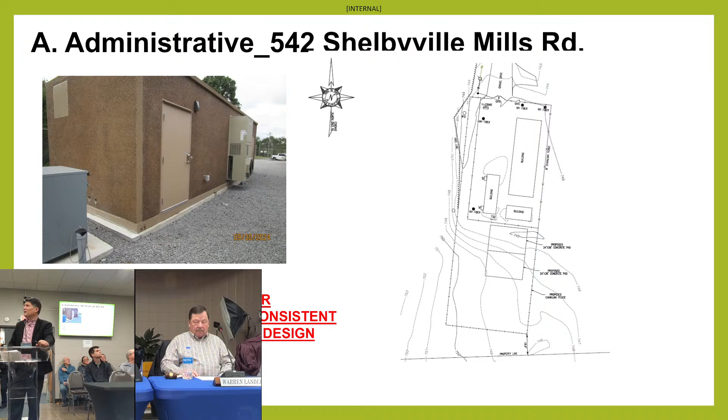You can see this is what the facility looks like. It's an I2 zone, so that type of design is permitted. And there's a bit of a blow up of the facility.

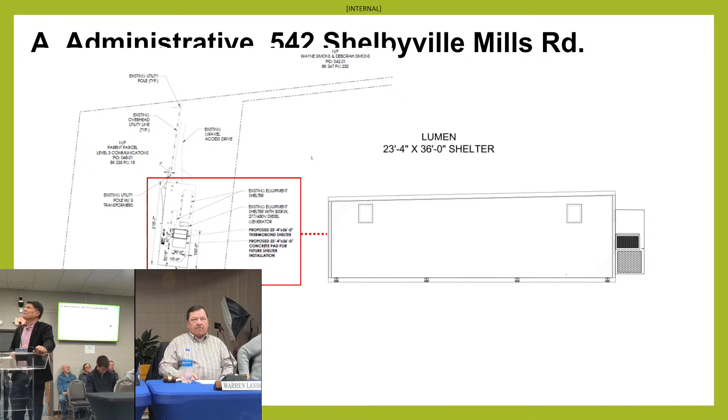And then our favorite, staff report. Did I need to wait for you? No, go ahead. Sorry, your name is, you've got the staff report. Go ahead.

Yes, so we had our growth committee on January 6th. There were a number of other people there, but the members of that committee appointed last year were Councilman Christie, I should say vice chair or vice mayor, and then our planning chair, which is Warren. Kevin Chastain's there because I have him tasked with the R4, which is the high density residential, as well as PUD, revising those standards.

Sometime next week I will send out what those changes are, but they were recommended by both the vice mayor and the chairman for the planning commission to review at the next meeting. We'll be looking at the PUD R4 standards. There were also some recommendations for improvements of the multifamily guideline, that's in our design guidelines.

And then the proposed subdivision regulation that has to do with stream buffers is something for where we have lots that are part of stream buffers. So you'll see that all three of these, green space, critical lot definition, and stream buffer, are all environmental amendments that we're going to propose.